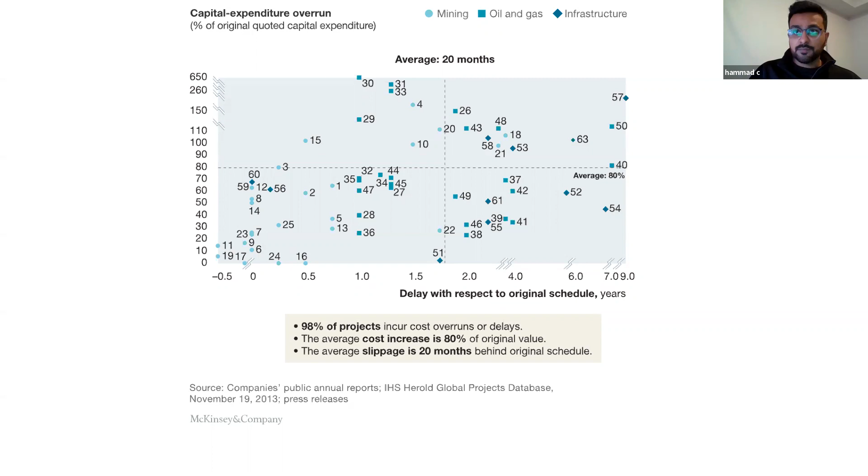But one of the things that really is stark and causes a little bit of concern for folks is the fact that the majority of projects are over their original budget, and behind their original schedule. So that means that not only are we going to be using more money than we anticipated to build these projects, we're also not going to be able to deliver a lot of these on time. So what's a way that we can reduce some of this risk?

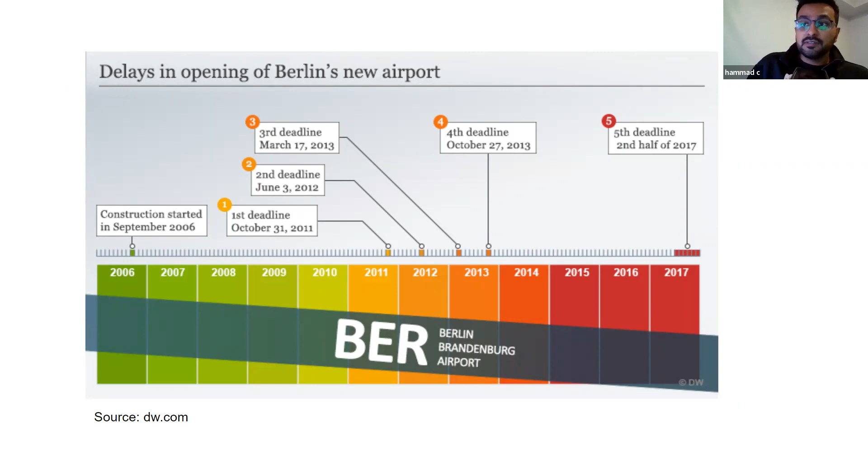Well, looking at some of the more advanced societies around the world, we realize that even they're facing these problems. So if you look in Germany, at the Berlin airport, this project was about 1.2 billion euros over budget, which is about 6 times what they originally thought. And not only was it behind schedule, but it was ridiculously behind schedule. Originally they thought it was going to open up in 2011, and they weren't able to open up until even recently now.

And if we shift gears and look at Apple as the tech guru, even though they're the most advanced company in the world, some would argue their project was more than $2 billion over budget and almost 2 years behind schedule as well.

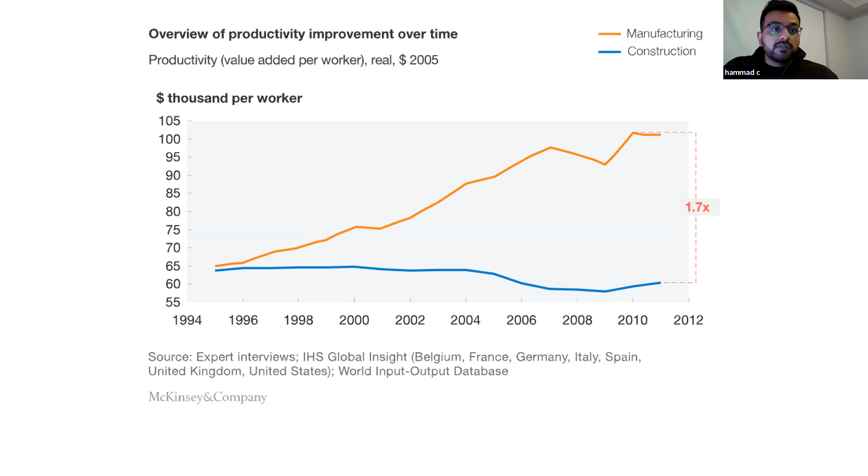Another key piece of information, which is really driving construction technology and design technology right now, is the productivity gap. So essentially at a high level, what this means is if you look at construction compared to any other traditional industry, especially manufacturing, there's almost a 2-time gap in how every $1,000 per worker gives you a return on your output.

So what we're starting to see is a shift within the AEC industry. And a really good example of that, in my opinion, is Dell from the computer industry. Back when Dell started, they were essentially just putting together other firms' parts. What they realized they had to do to stay competitive was create virtual integration within the supply chain. So they made strategic partnerships, and Michael Dell called this a tightly coordinated supply chain.

And what this allowed them to do was not necessarily spend capital to buy up companies, but make strategic partnerships with other companies in the supply chain so they get better pricing and could compete. Now, this is similar to what we're seeing with large projects within our industry. So think about your large hospitals, highway projects, or even your public library projects. They're typically public procurement methods of a design build or a P3, where the architect, the contractor, the subcontractors, and the owner are all creating these kinds of relationships.

But one of the key differences, for architecture especially, is the fact that we don't have two buildings that look the same. Even if it's a hospital or a high-rise tower or an airport control tower, all of these are going to be unique time in and time out.

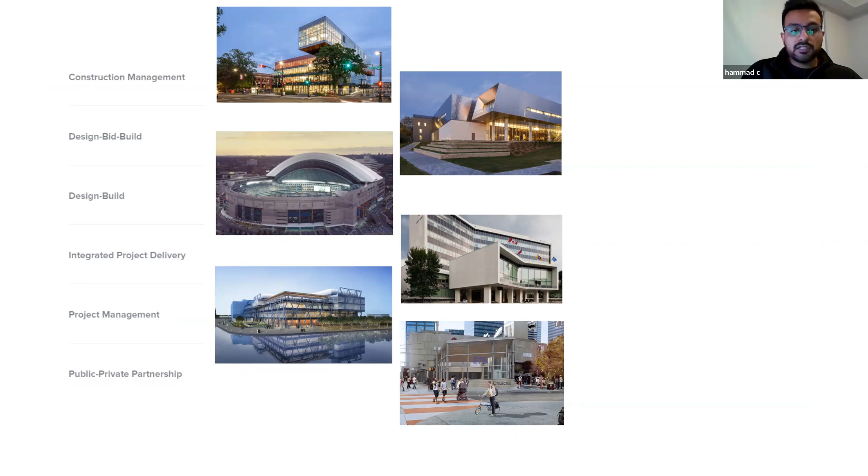And so that is very, very reflective of why there's a lot of different contract types in the industry. So we work across anything from a CM or construction management contract all the way down to a P3, and each contract is trying to shift risk, right?

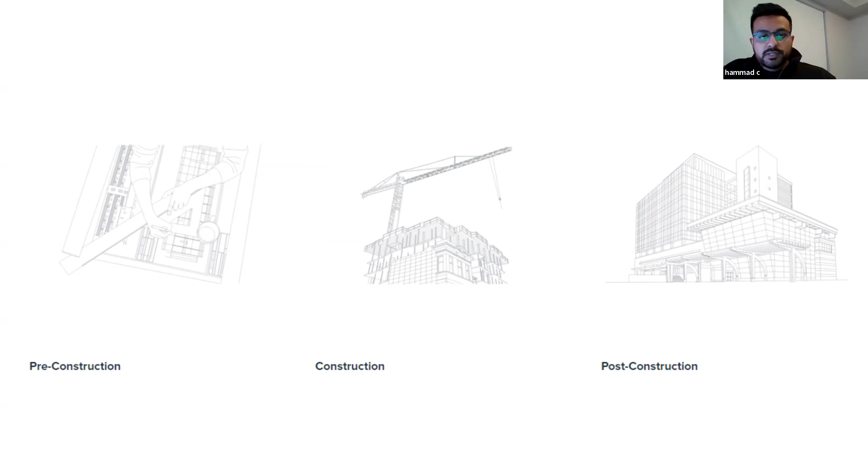Now, another key piece of information is the fact that according to some estimates, so this is McKinsey again, and there's various estimates you could take a look at, but we have a lot of folks that are estimating that there's about $1.5 to $2 trillion being left on the table from a loss of productivity. So that's where VDC is coming in. So what we're trying to do is focus on each area of a project's life, pre-construction, construction, and post-construction, and really implement a process that allows us to leverage construction technology.

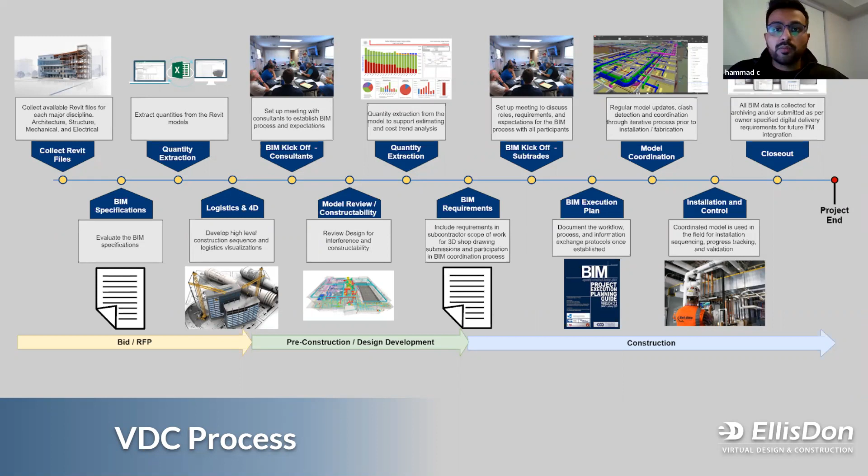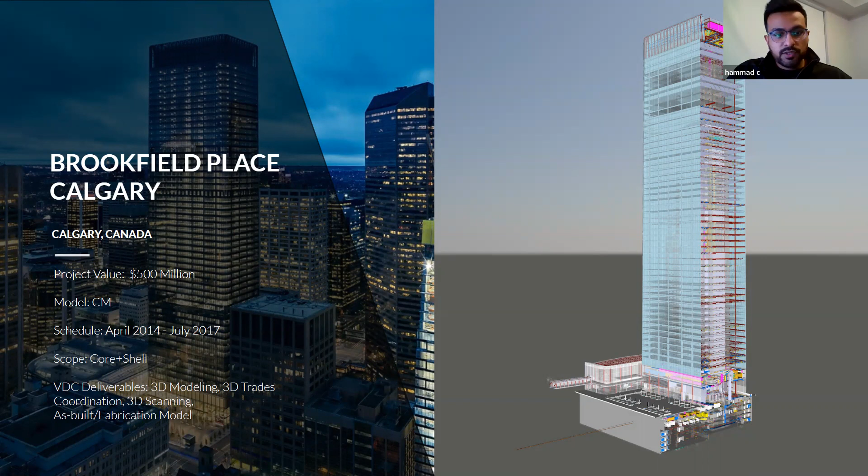So I'm not going to go through this process in detail, but I wanted to explain that as every project evolves, whether you're on the design team or you're with an owner or you're working for a general contractor, so on and so forth, there's a very stipulated process that you could follow to ensure success on your projects. And this is becoming more and more clear as a mandate. So right now we're working on dozens of projects. Brookfield Place, we wrapped that up recently, and there's some pretty heavy requirements on that. So $500 million project, where we use 3D modeling with the trades and the design team, some 3D scanning to create an as-built model at the end of it.

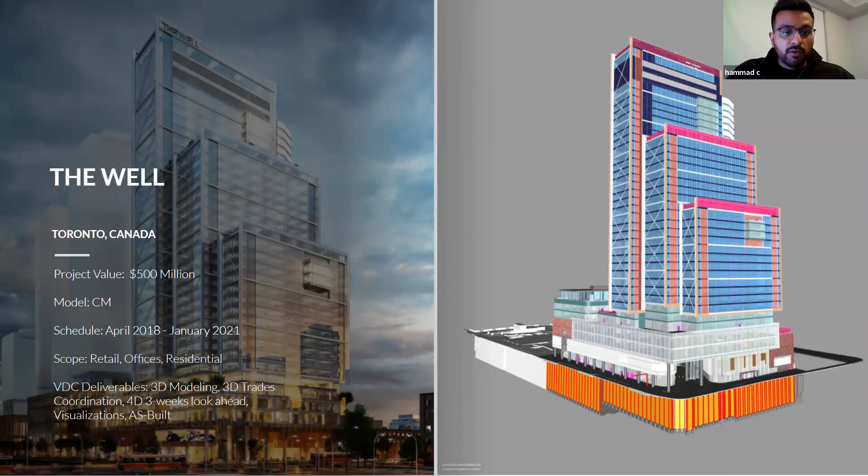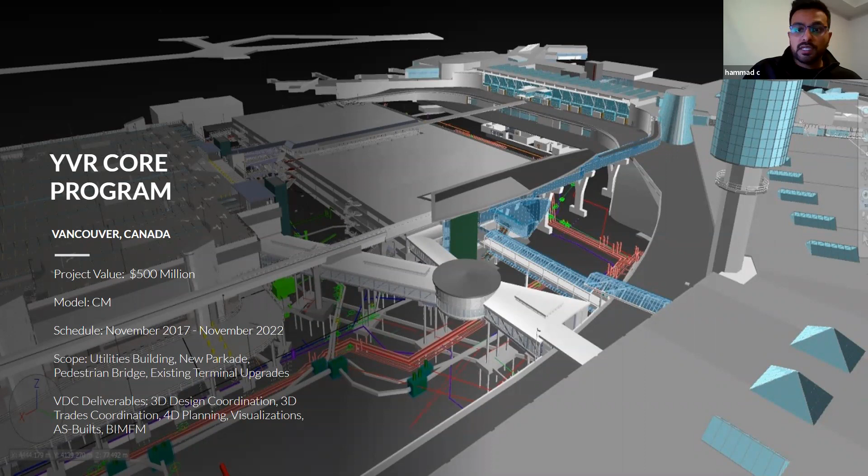And then lastly, at a high level is YVR. So this is a commercial project with a lot of infrastructure guts that is part of a very unique scope of work, right? So not only do we have to use 3D models to get this project done, we have to deliver 4D deliverables to the client, and we're 3D scanning, and there's also a lot of data as-built requirements. So this is the full gamut of using construction technology, all while making sure that the airport stays operational. So it's quite a heavy project.

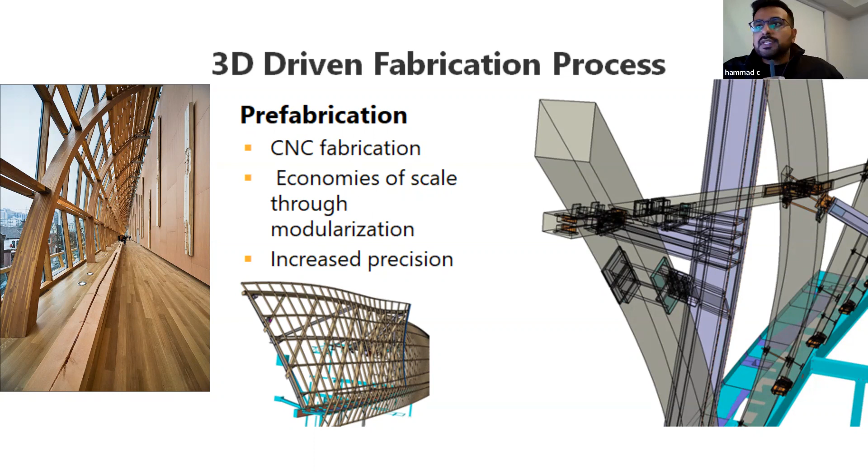And you know what? We use it on big projects, small projects, all across the board. We work with a lot of smaller architectural firms, some really big firms, and at the end of the day, the tools make it a lot easier for us to pull off a smooth execution of these projects. So if you look at the AGO, Art Gallery of Ontario, it's a very significant project, architecturally speaking. And once you go inside, you see this beautiful work of art, literally, which is the facade. And without these sort of 3D-driven fabrication technologies, we would not have been able to pull this off within the time frame that you needed to get it done. And same thing on the back of this building.

If you look at that staircase there, it's just, again, another piece of art. But how are you going to coordinate that without 3D tools and technologies? So what we had to do is break this out into different scopes of work and packages. And once different elements arrived on site, we used a 3D scanner to capture this information so that the next scope of work or contractor could build their information to coordinate with that.

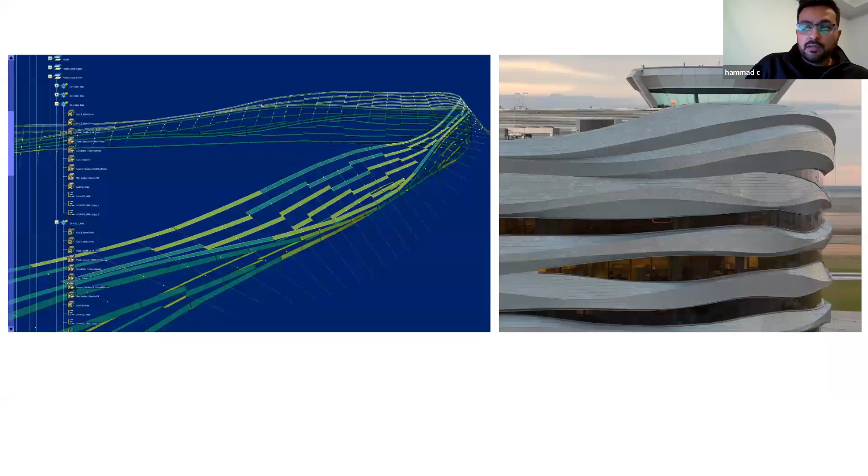If you look at the Edmonton Control Tower, that's another really good example of how technology not only made it possible to design this information, but also how it made it possible for us to fabricate and install.

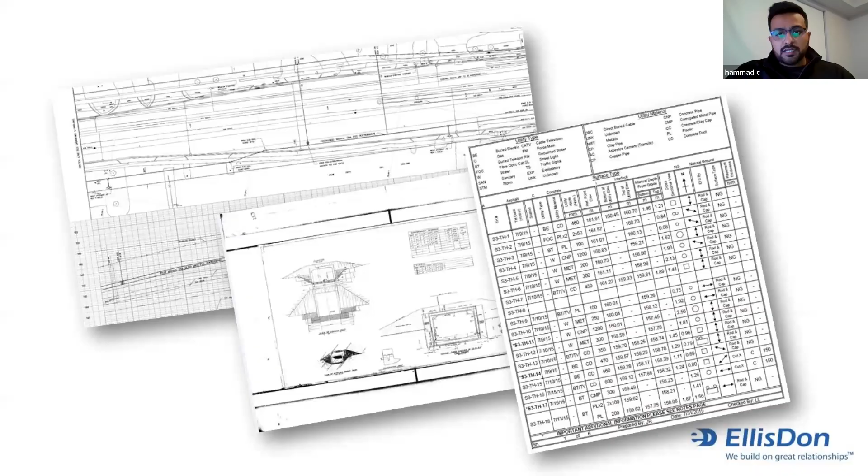So essentially, to put it at a high level, we're looking at creating more tangible information and de-risking this for everybody in the project. So typically you'd look at 2D drawings like this, sections and schedules. What we found is that if we have 3D tools and technologies, we can put together information that very accurately shows what's going on.

Oops, seems like we lost. Did we lose Hammad? I'm just seeing a kind of a lonely little white telephone handset. You're still there though, Henry, right? I'm still here. Hammad, are you still there? Looks like he might have. Do you want to send him a chat, Henry, to see if we can get him back on? Yep. That serves me right for touting the reliability of Zoom, isn't it? I should have known that if I said that, we'd have something like this. You jinxed it. Absolutely. Okay, let me just send him a quick message. Okay. Oh, he's back. He's back. Wonderful. Hello? Hey guys, can you hear me now? We seem to have missed you for a second there. Perfect. Hey, sorry about that. I don't know what happened there. It's all good. All right. Can you see my screen? Yes. All right. So sorry about that, everyone. Picking up where we left off here.

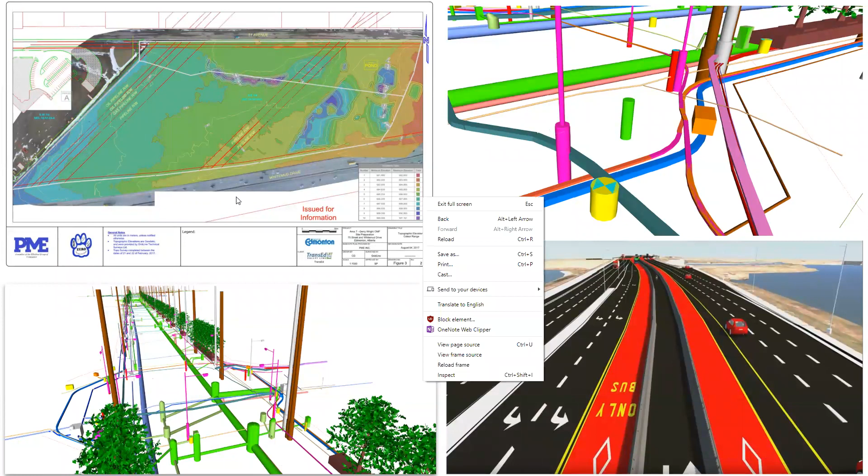So essentially what I was trying to get at is using these tools of 3D technology, not only does it make it easier for people to visualize what's going on, but we can catch a lot of these issues that typically fall between the cracks on 2D drawing production. And so we're going to go through some examples and give you a little bit of an overview of what we mean.

So at the beginning stages of a project, an architectural firm and a client may be working together and they have an idea of the project they want to build, but they don't know who's going to build this project. So what they do often is come out in the form of an RFP, or request for proposal, and ask different construction teams to explain how are you going to put our building together. And so what we have been focusing on at EllisDon is creating tangible little videos that marry the construction schedule to the actual model to explain to our clients how we're going to be executing our portion of the work.

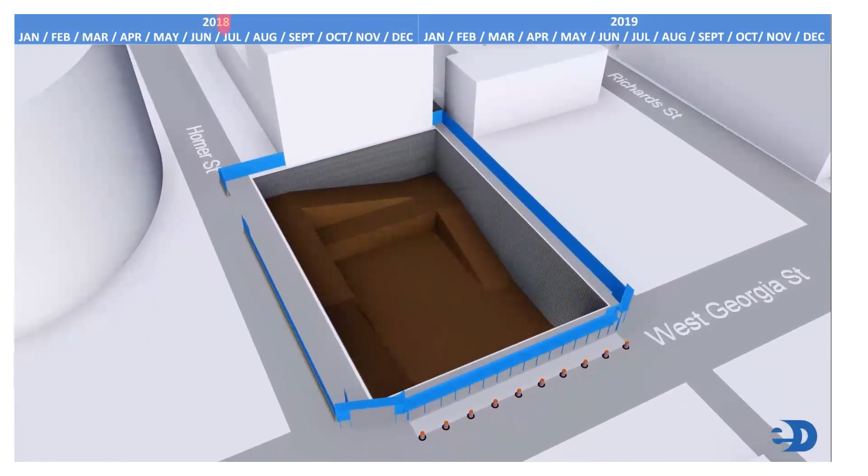So it can include things like your trucks, where the material is going to come in, your cranes, if we have any lane shutdowns. And then it also goes into the detail of showing the structure and your facade, your curtain wall, and so on and so forth. So I'm just going to speed this video up a bit so you guys can take a look.

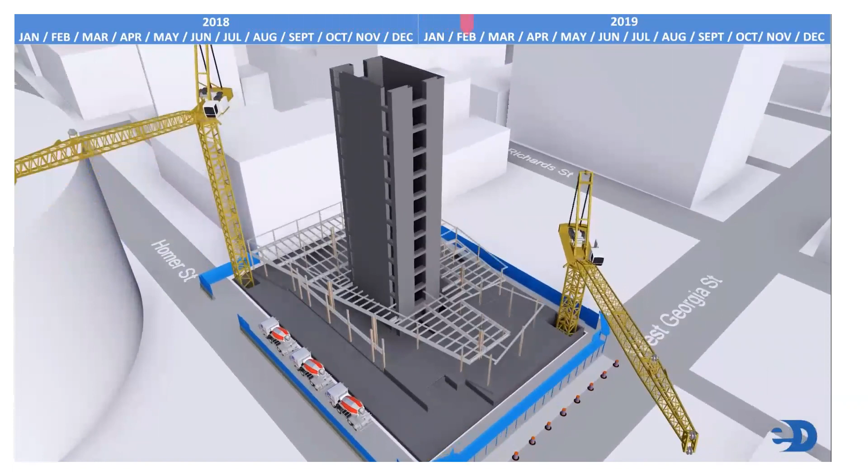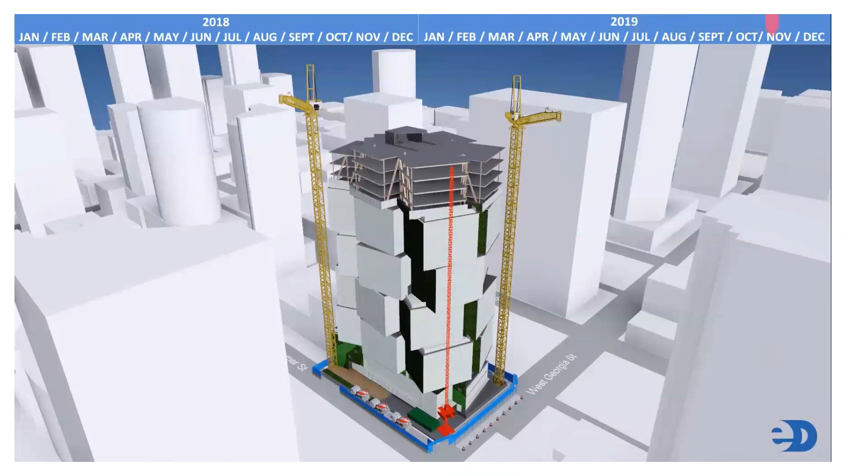And on this 400 West Georgia project, one of the things that really makes it a challenge is that each of these bays that you see, there are 4 floors each, and they're all offset and skewed. So you don't really get a straight path throughout the tower or the building. So placement of cranes or your material hoists, or even logistics of getting your typical services like your elevator up, really do play a lot more of a challenge than you would anticipate, even though it looks like it's just a bunch of boxes stacked on top of each other. So that sequence is very important to explain to the owner, but that's a little bit high level.

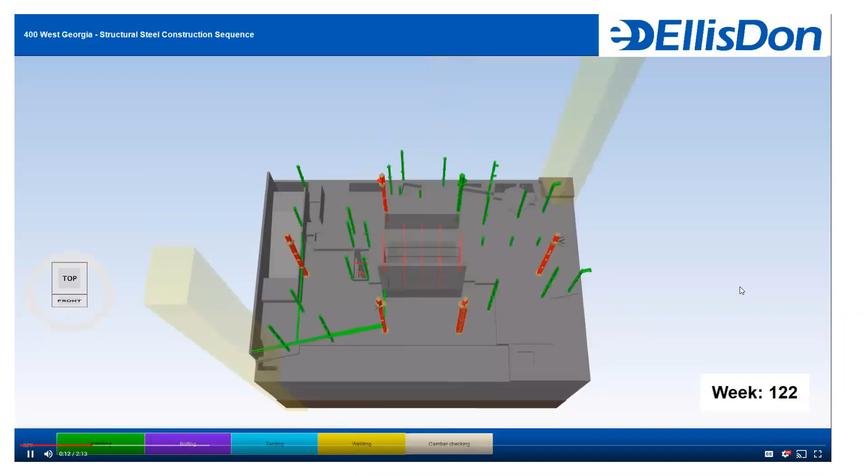On the same project, we were able to use 4D modeling to take it a little bit more detailed. So we had to explain in detail, to ensure that we stayed on track for a construction schedule, how we are going to use each of these model elements to replicate our installation sequence for steel. So this is literally down to your nut and bolt level granularity.

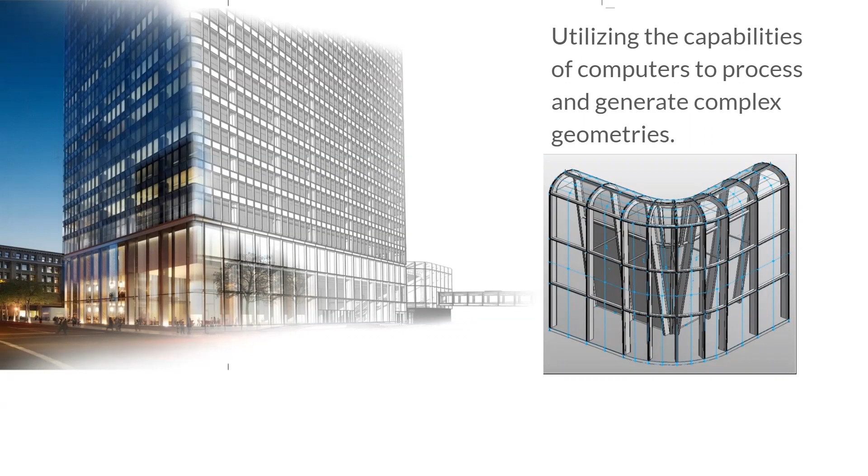The other reason why this technology is becoming a lot more important for us at EllisDon and for our design partners is it's becoming a lot more complex in terms of the geometries and the needs and tastes of clients in the industry. So in order to pull this off, we need computers that can do things like parametric modeling and leveraging repetition. But at the same time, we're losing that ability to have insight into very detailed, coordinated building systems.

Because even though the building itself is the main goal of any project, in order for it to operate successfully you need mechanical and electrical systems. Think about that as your lungs and your heart and your eyes and all that kind of stuff in your body. These are the things that really make the building valuable and sustainable long term. And by using these 3D tools, you're able to dig into those, and even unconventional areas such as concrete.

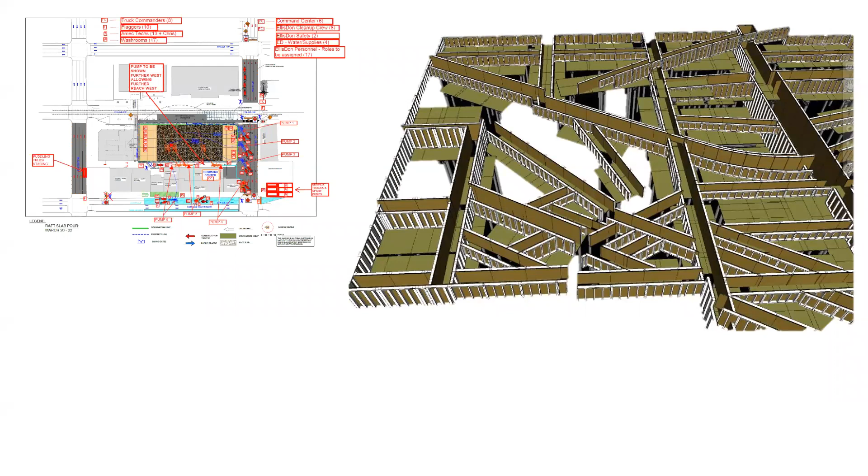So that same project, Manulife downtown in Calgary, we used that model and pushed it down to the folks in the field so that we could get prefabricated concrete formwork. You can see the concrete trucks there on the bottom left, and on the right side, that's all the prefabricated elements derived from a model. So if you think about it at a high scale, you're an architect working on this building, who would have thought that your model would have been repurposed downstream to provide these formwork pieces for these guys with hammers and nails, right?

So the technology really has some deep and profound impacts. Another really good example of that is shop drawing reviews. On one of our projects, Brookfield Place in Calgary, we had these huge monster transfer girders, and essentially they transferred the load of the tower to the ground below and into the parkade.

And so to order these monster girders, the steel had to be ordered directly from Germany, and there's a procurement tax. So when you're ordering something this big, it comes on a boat, coming from the port, so you have unknown factors like customs and stuff like that.

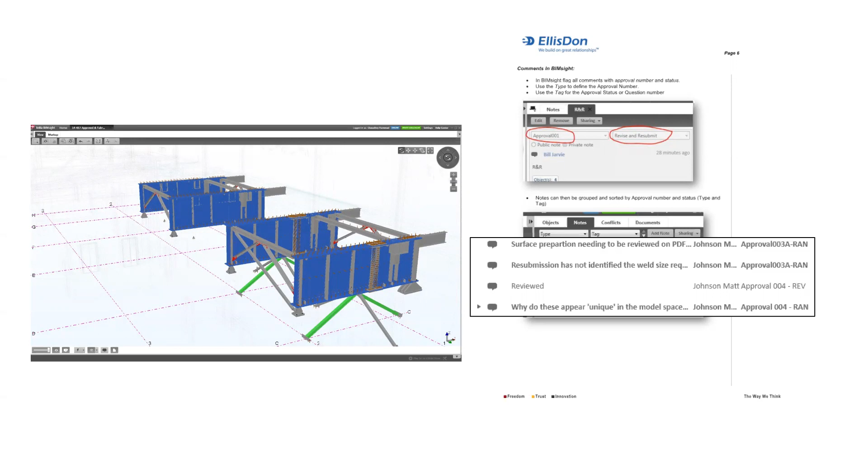But shop drawing reviews was not something that we could waste time on. So we implemented a 3D shop drawing review process where the engineer, our fabricator, the architect, and the owner were all in a 3D environment getting updates real time. Think about it like MSN Messenger or ICQ back in the day, but for construction projects, right? And essentially that saved us a lot of time. We only sent one submission through at the end of the day, which is quite remarkable.

Another really cool project where we used various technologies was the PARQ Casino in Vancouver, right by BC Place. There were a lot of variables on this project. The hotel requirements kept changing, there's two different hotels, and the requirements for the actual casino were changing at the time. So every design iteration, we had different amounts of concrete and steel and curtain wall and you name it.

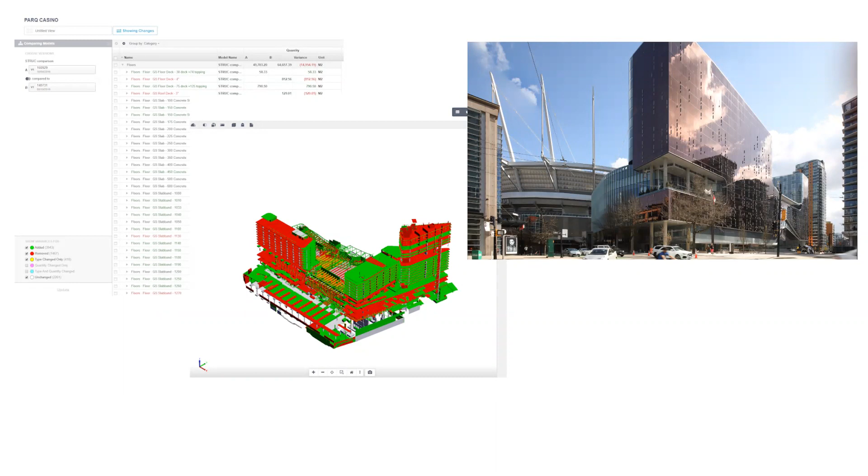So using technology allowed us to simplify and color code information to this level, where red meant this is no longer there, green meant this is brand new, and other colors could signal that maybe only a little bit of this has changed. We were really able to bring that kind of technology and approach to a lot of our different projects. Not every project is the same, so we don't use the same approach when it comes to technology.

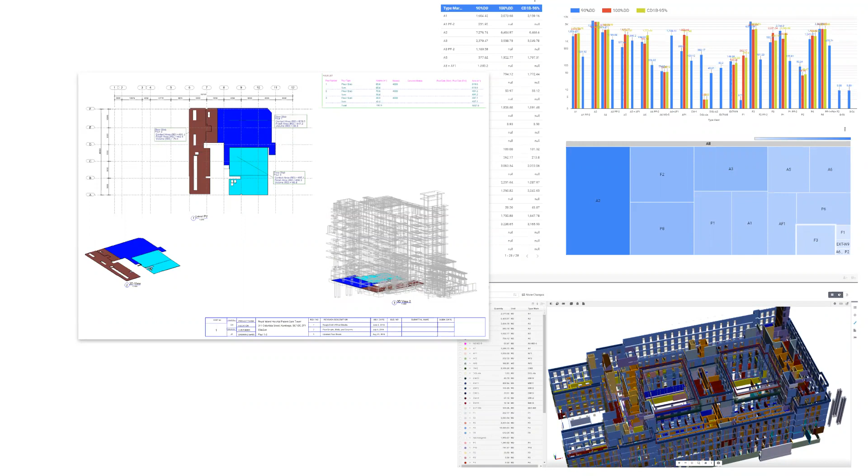One of the things that's really key is that everybody participates in a process like this. Everybody could be pulling their weight, but I often say we're only as strong as the weakest chain link we have in this process. So if that means the architect's not working, or one of the subcontractors, the efforts of everybody are broken. In our projects, we have the owner, the architect, the designers, construction administrators, the subcontractors, all sitting there calling in, working together. It's a very good reflection actually of what Douglas and Henry are doing with these virtual lectures. It's the same kind of idea.

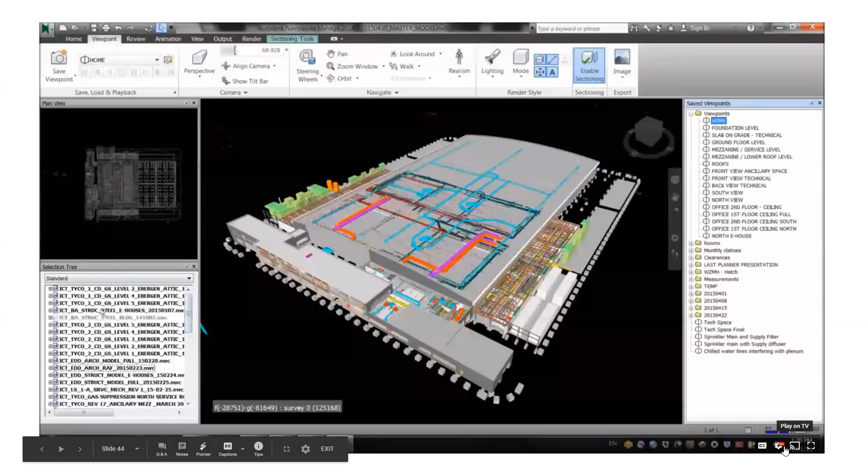What that looks like on the model or 3D side of things is you end up with these really highly detailed models which are brought together so we can run construction coordination challenges, like does this duct fit through this wall. But we can get even more granular, like we need X amount of clearance from our door swings, or clearance for different equipment pieces. So the model is really a replication of what's going to be built on site.

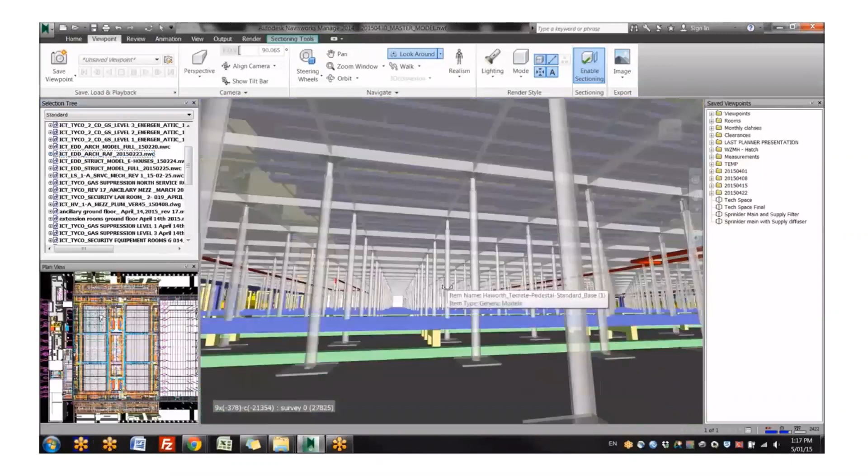So we want to treat that with that same kind of value that you would building it out in the real world. And that's why it's really critical to partner with folks to understand the value of this technology, because downstream the effects are just too much to measure.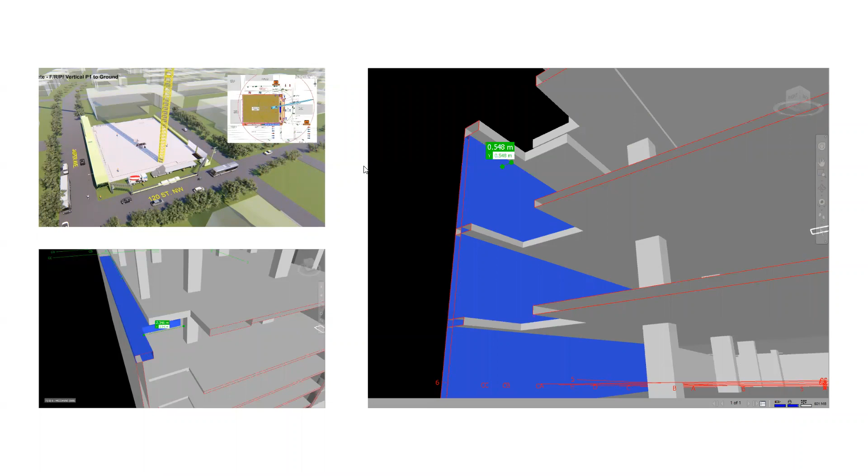After doing that, we were able to render an image that you see on the top left there, which was distributed to the owner group in a way that they could distill the information. So we still produce those 2D drawings that are very information heavy, but the way we proposed it to the client let them present it to their stakeholders and ultimately helped us move forward with a solution that saved us a lot of time and money too.

One of the ways that we're really leveraging this is using platforms like Revizto or BIM Track, where you're able to track a lot of this information regardless of the platform.

Recently we had to do a helicopter review where there's very stringent requirements for the health authority, and one of the consultants only used a Macintosh. Luckily, because we're using tools like Revizto, we were able to get their team on board, the client on board, and a bunch of folks on site using iPads, and it didn't make a difference because of that level of technology integration.

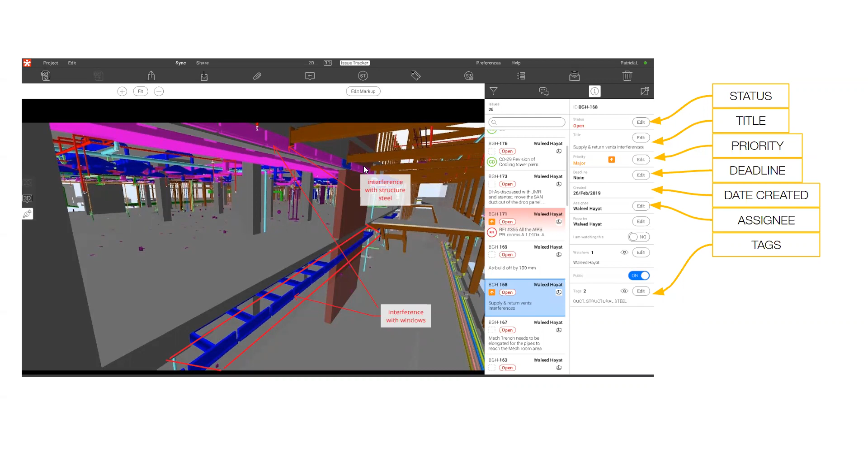What we're able to do is track a lot more than just simple clashes of, hey, this duct isn't hitting there. It's also using this to create transparency between design teams.

Ultimately, we're able to pull a lot of these metrics, which is what really is driving decisions nowadays, is data. So we can filter down by level if you wanted to, or by a different discipline, to see how many issues we have or how many tickets we may have open and the progression of us solving them. That way, within 30 seconds, we can tell if the project is progressing or not, and we know that we can build off of it.

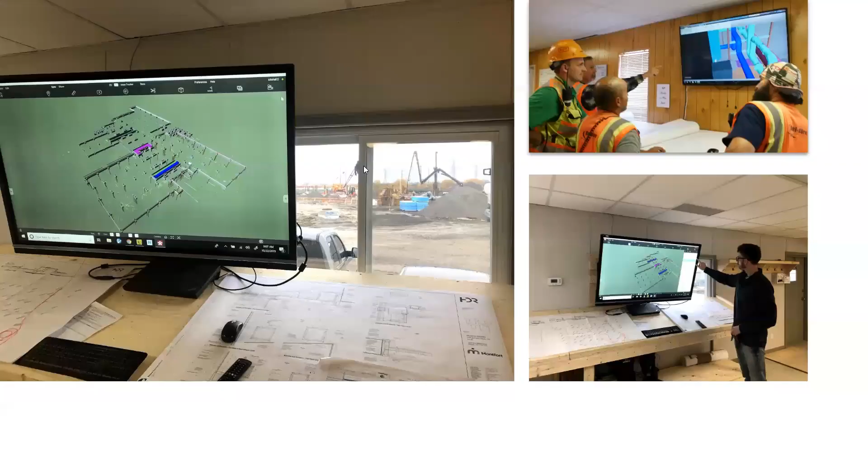Going out on site with your iPad, you can pull up the model really quickly compared to looking at the progress to make sure everything's going okay. If you go to most of our site trailers now, you'll have these TVs, you'll have the models and the drawings paired, and you'll increasingly see more and more of the folks, the trades and the owners using the model over the drawings.

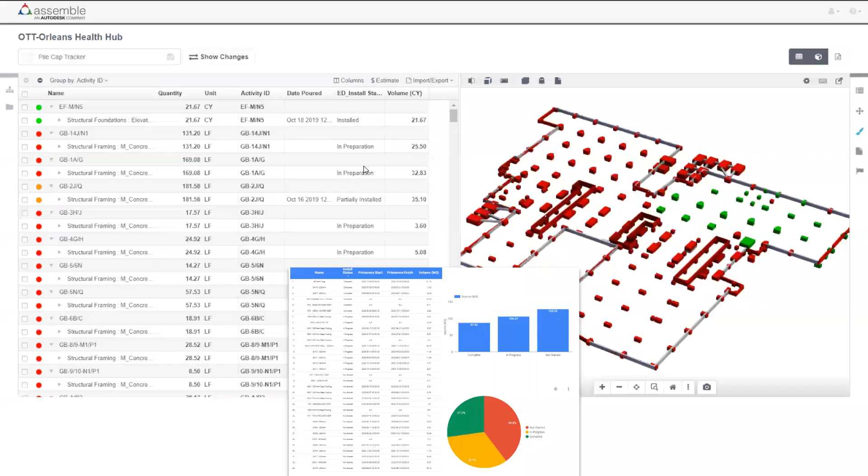Going back to the data, this is an example of how we're tracking it. Anybody in the project can log into this web-based viewer, and with simple color coding, green means it's been installed, red means it's not there yet, and we can compare that to the actual site photo. I'll just go back and forth again because I think it's really cool, but we're using very simple model-based communication to represent what's happening in the physical world.

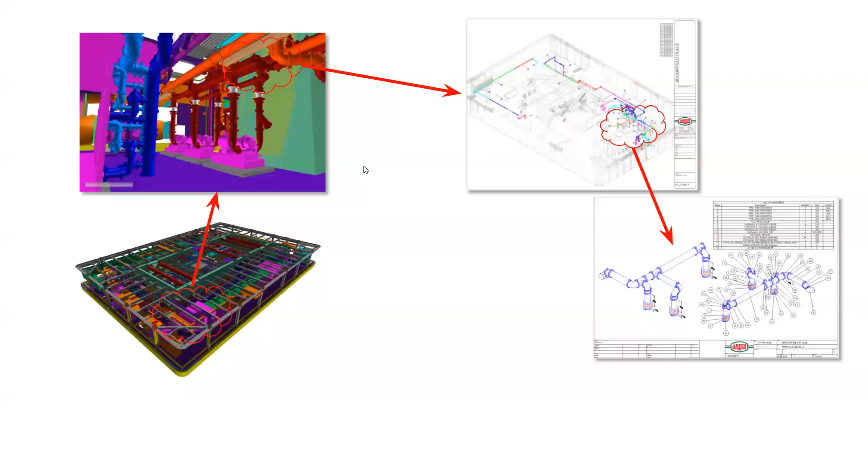These kinds of processes allow us to use technology to a level where we can actually fabricate off-site. So if you look at these drawings here, what they're illustrating is prefabricated spools for systems in a high-rise tower. This is just like Lego, so the folks come on site and they install this information just like Lego.

So they can be in the form of prefabricated multi-trade racks. It could be bathroom pods. It could be mechanical skids for systems. It could even be your facade architectural system.

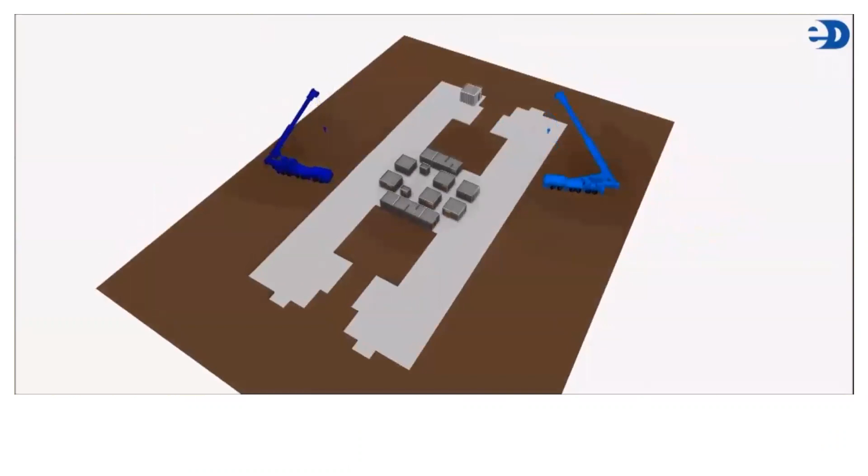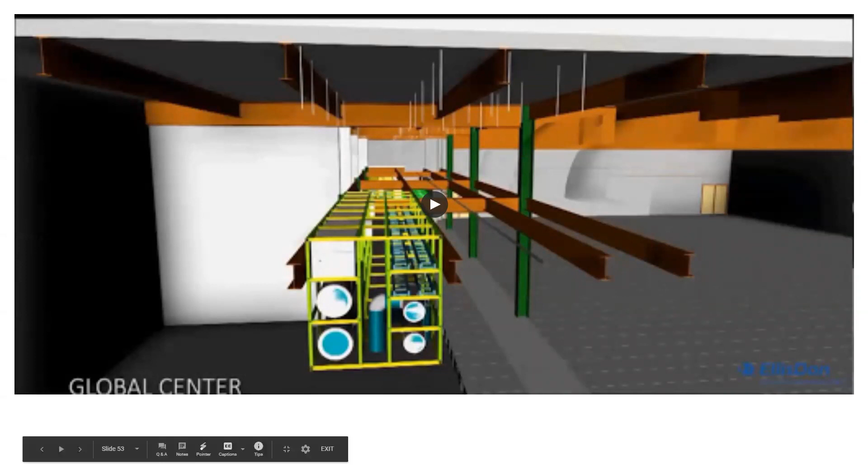A lot of the benefits for this is if you do it right financially, there's some incentives at times. There's a lot of flexibility for you to make decisions and change the design. You can control the quality a lot more than trying to build it on site with the weather conditions we typically see out here. And you can allow for just-in-time delivery. At the end of the day, safety metrics go up as well. There's a huge correlation of safety being a lot higher in prefabrication elements.

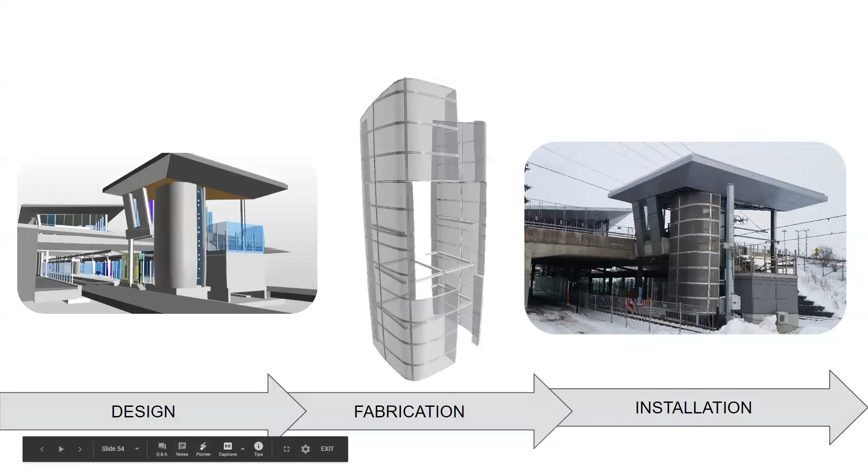Here's another example from a project we just wrapped up where we used this approach. We used the design model with our contractors to get the fabrication details out, and at the end of the day, it was installed like that. So it's not the future anymore - this is what's happening in the industry.

What I want to show you is a little bit more: adding logistics, adding schedule, you get 4D modeling - we looked at that video at 400 West Georgia. But what if we add financial information to that and resource tracking? Then what you get is something called 5D modeling, and this is going to be more and more important as productivity tracking gets tracked.

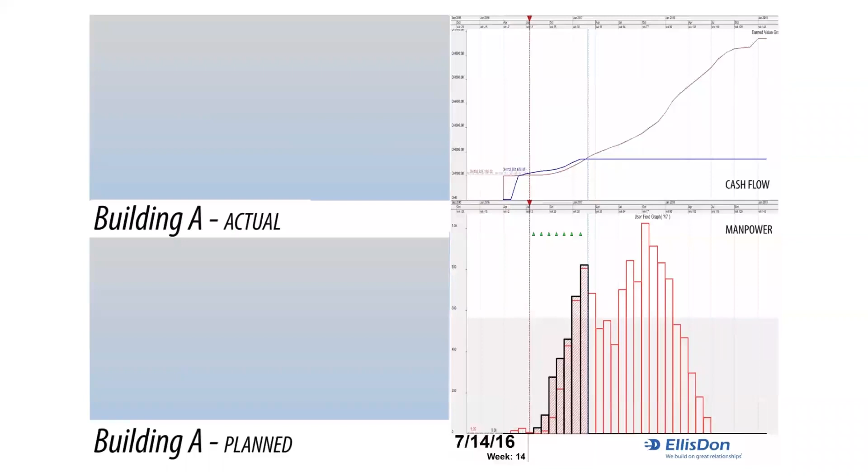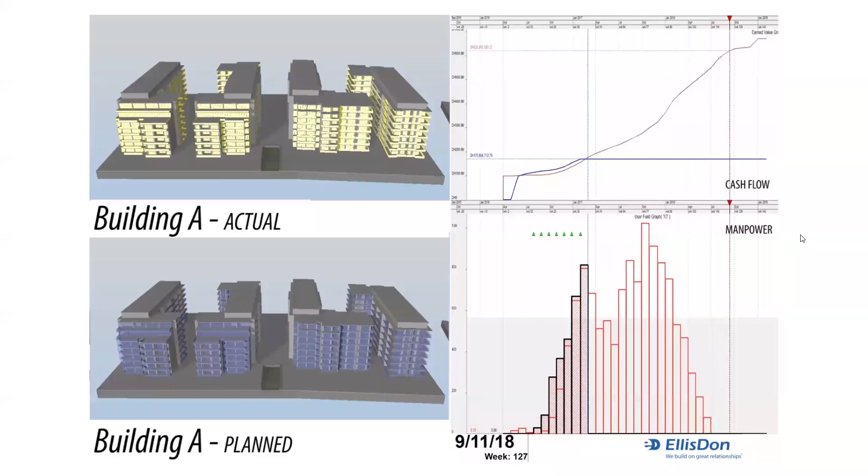We can look at not only what we were trying to build plan-wise, but what we're actually building, compare that with how much money we've spent versus what was forecasted, and how many people we have on site physically working. This is the granularity the technology is going to allow us to get to. This isn't commonplace yet - it's still a bit out there on the fringes, but the fact that we have clients looking at this means the industry is shifting to that level.

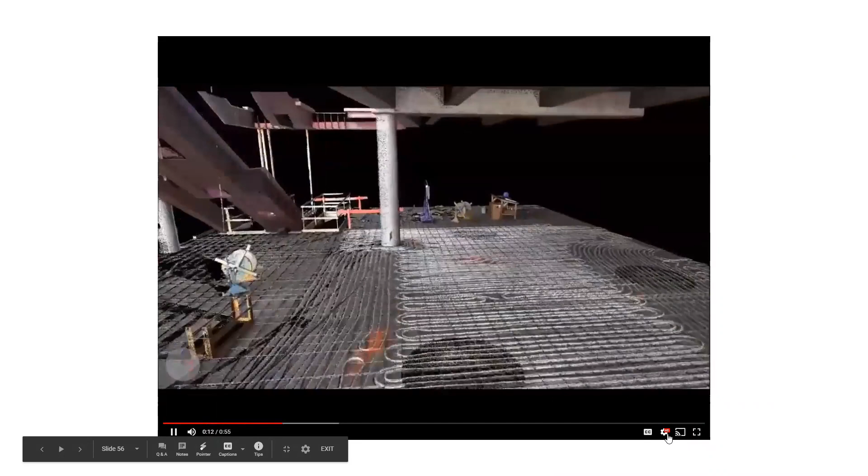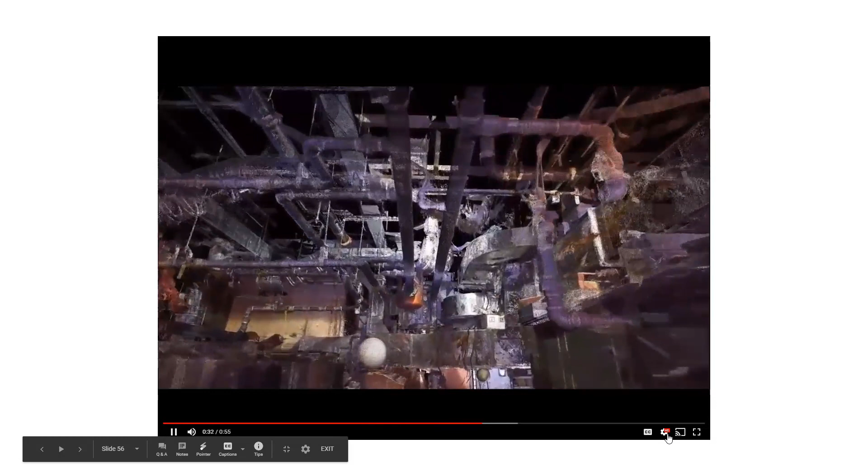Another really great aspect is using technologies to capture what's around us, so we can design for repurposing jobs or future tenant work. What you're looking at right now is from the YYC International Airport, where there's a lot of in-slab heating - these little pipes carry fluid that warm up the slab, providing a nice, warm, comfortable environment for travelers. But they needed to know where those pipes were for future use, so we could put kiosks in without damaging the line. This is a mechanical room as well, for another project where they needed to expand their building and bring in mechanical systems to tie into that.

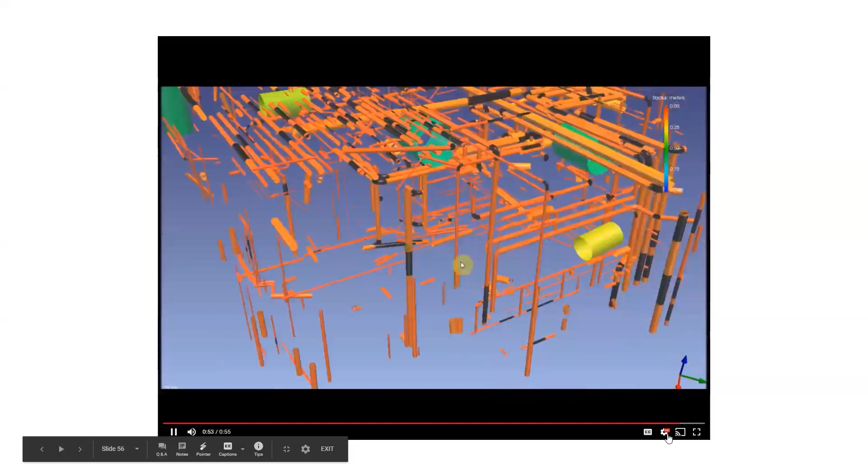By going out there, 3D scanning all of it, and creating a 3D model, giving that back to the design team, you're really able to reduce a lot of risk. A lot of the design firms we're working with now, some of the more cutting edge ones, are actually able to do a lot of these processes in-house. For us, that's an interesting shift - architectural firms that want to use BIM and technology are starting to use scanning as part of their workflow too.

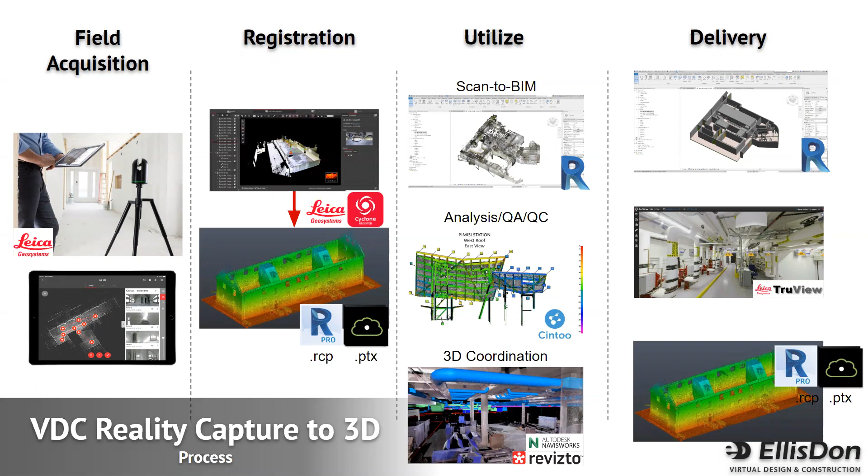Here's our overall process for going from the field to your final product. We use a laser scanner - there's a variety out there, feel free to reach out if you have questions. Once you scan your information, you register it so it's all aligned and works with your model. Then we bring it into Revit, do our scan-to-BIM modeling, do some really high-level QA/QC on it, and ultimately 3D coordination, which allows us to do some really cool things.

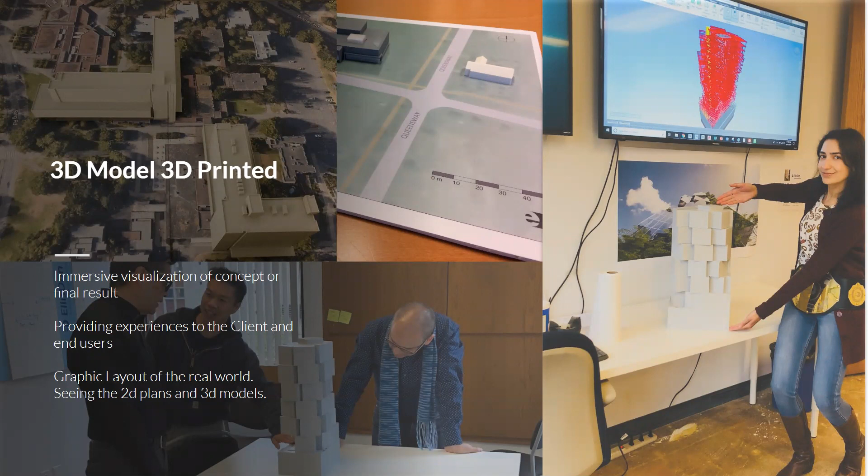And the model actually comes apart. We print out site plans that are very indicative, either like a Google Maps or something similar. And you plot the building down and you show them how much room certain things are going to take, your cranes and stuff like that. It really allows not only the design team and the owner, but even some of our internal folks to visualize it in a way that no amount of 2D drawings or 3D models could ever convey.

And another really neat technology that's just shot up over the past couple of years is 360 photography, where people are able to literally record videos in 360, walk a project and dump that information as an archive back onto a system. And so we've been experimenting with this. We have a lot of projects now that just use 360 photography to track progress.

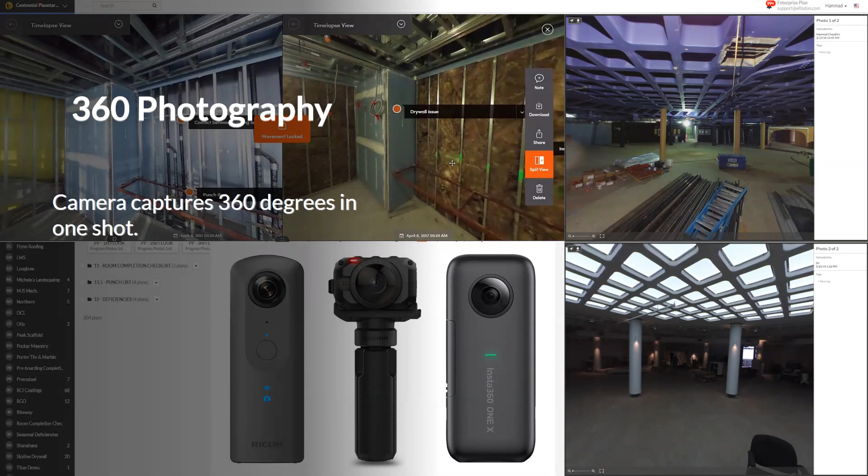So where your piping is and you put your insulation and your drywall, instead of taking 10 pictures of one room, you only have to take one. You can come back and look at it. Very cool. And now we're starting to see integration of 360 photography back to your model, so you can compare your design to what's being installed.

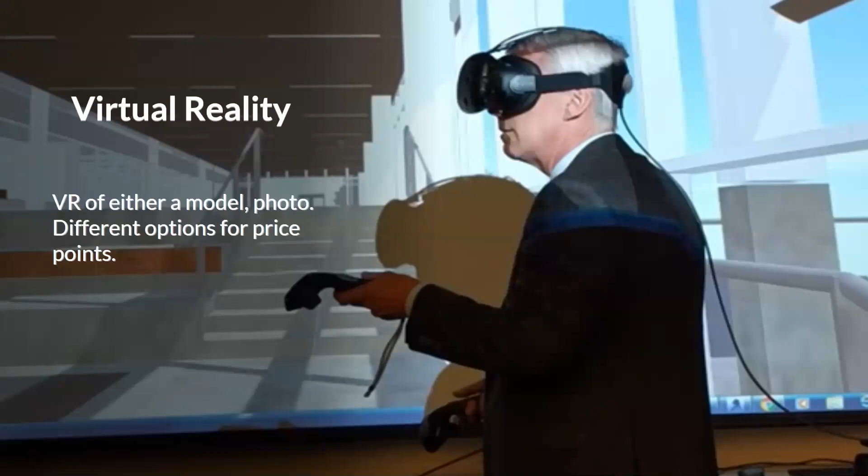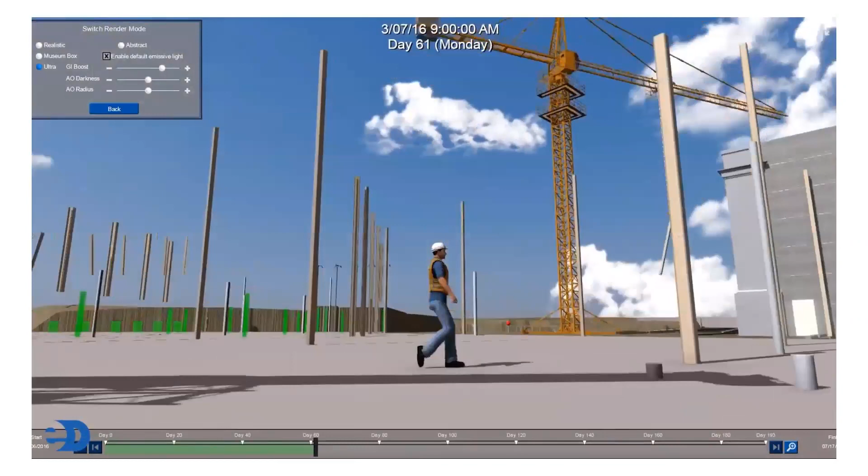And one of the more video game aspects, if you will, of virtual design and construction is the VR side of things. So we're starting to see a lot more traction in the industry with this. So not only are clients starting to ask for it on the larger projects, but we're starting to see that even some of the talent that you're trying to recruit now at companies want to see these tools used within day-to-day work or some sort of a process in the company.

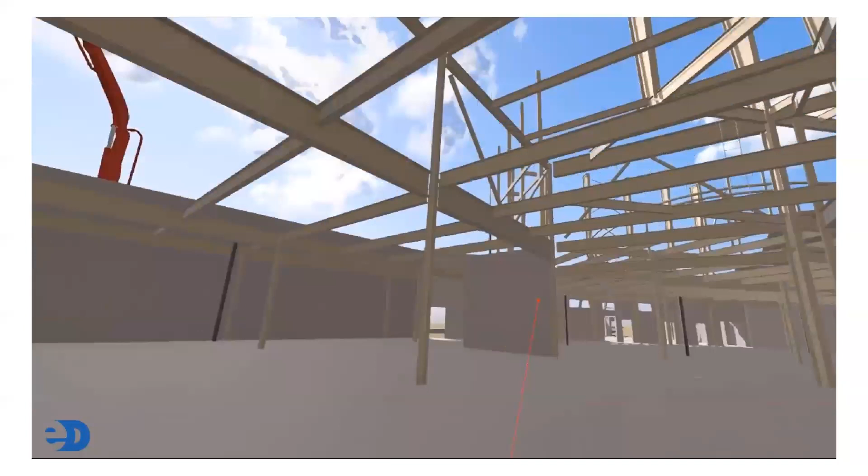So just recently we had a meeting with a client in Vancouver, and they own about 3-4 high-rises, a very big complex. And as part of their RFP, they wanted us to prove that we knew how to use construction and design technologies. And so what we ended up doing was scanning their project, creating a 3D model, and then putting it in a VR environment just like this one here, and putting the client and their team into it so that they could literally fly through, look at the point cloud, and look at their 3D model, and really get a feel for what kind of technology is available out there.

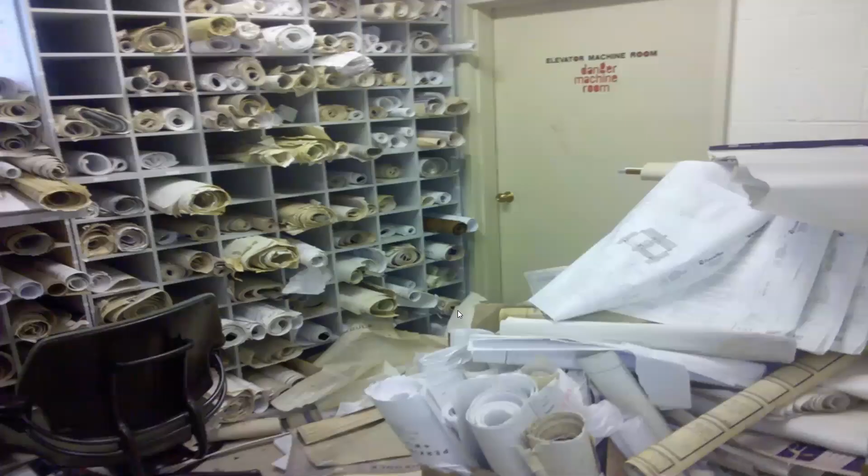And lastly, wrapping up, the project's done, you're turning it over. So what typically architects and contractors have to do is provide these binders and manuals to the owner and the operation team. So if you look at this picture, there's dozens of binders that are super thick. And anytime we come back to a project, this is what that room looks like at the end of it, right? So everything's sort of chaos and not organized. So what we've been really focusing on is how do we get that into a digital realm, right? So we leave the client with just a digital file that encompasses all of that.

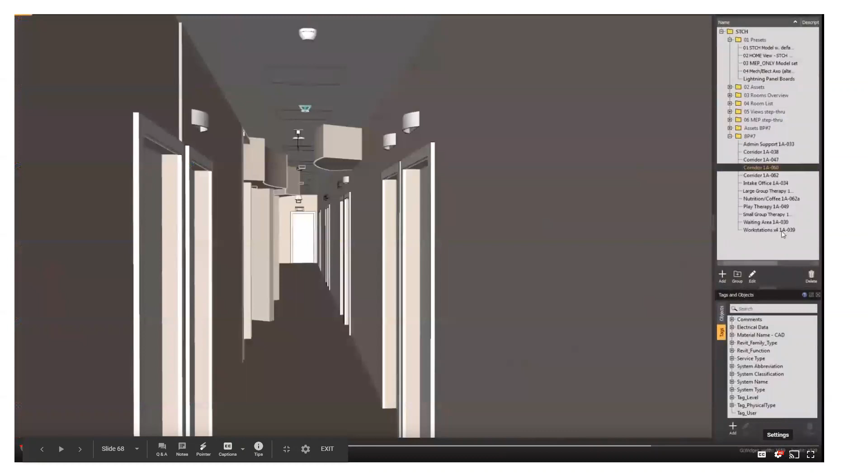So this is an example of exactly that. We're able to create an as-built model that was embedded with all that data. So think about your shop drawings, your operator manuals, your warranty certificates, your installation dates, all of that kind of information being built into the model. Instead of looking through dozens of binders, you can open up the model, sort of fly to the area that you're curious about, click on that object, and investigate it.

And this is becoming a lot more intelligent as well now, and that's what we've been focusing on as well: why do we need to stop at that? Why not take this to the IoT or the smart buildings realm? And so at EllisDon, we have a group that also focuses on taking all of these backbones of your system and making them smart. So think about the high-rise towers that you folks see. Imagine in the next 5 to 10 years, you're going to be able to do the same thing that you can at home.

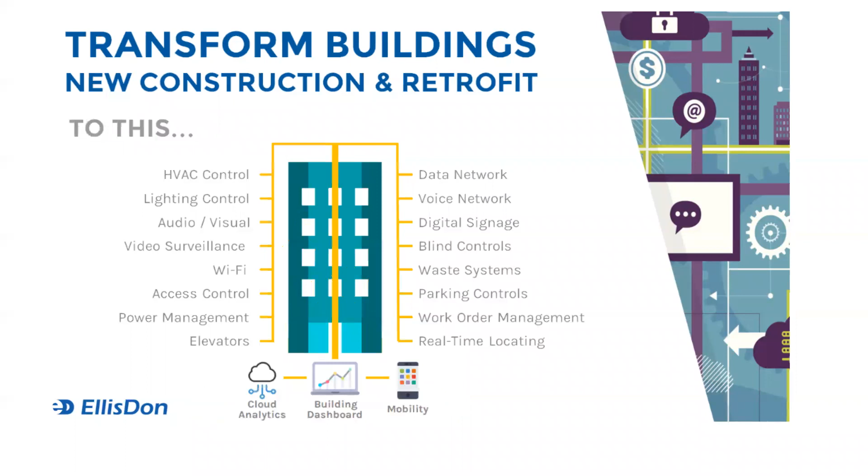So you can be like, hey Google, turn the temperature down, or hey Google, turn the lights off. Imagine that being done at a large scale throughout the portfolio of these corporations. So taking systems that are all chaotic, like you see here, and tying them into a single building dashboard that is really intelligent, and gives the owner and the users an experience that is refined and a lot more responsible for giving these optimized results, right?

So imagine what you can do if you know exactly how much power your buildings utilize throughout the day, throughout the year, and now you need to replicate and build another project somewhere, and so on and so forth. Or if some of your tenants are complaining, hey, it's too dark or it's too cold, you can look at these graphs and the heating from the sun to make these kinds of adjustments.

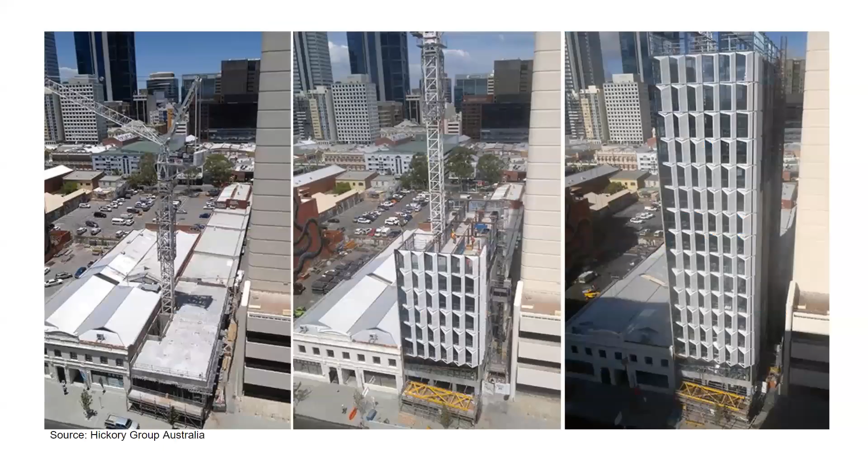Very smart. And we've been able to pull this off on half a dozen projects from coast to coast. Manulife, Brookfield Place, we're working in different facets there. And then even if you go out onto the East Coast, we have several projects in Halifax, Emera's head office. Very cool if you get a chance to check that out.

Really cool things that we're seeing with prefabrication, again, which is really driven by design and construction integration, is rapid growth of buildings. So what you're seeing on the left is about 10 weeks before what you see on the right. And so they were able to put the structure together, including all of your prefab elements, your bathroom, your facade, your concrete, within 10 weeks. Typically that would take you over 6 months on a traditional build method, right?

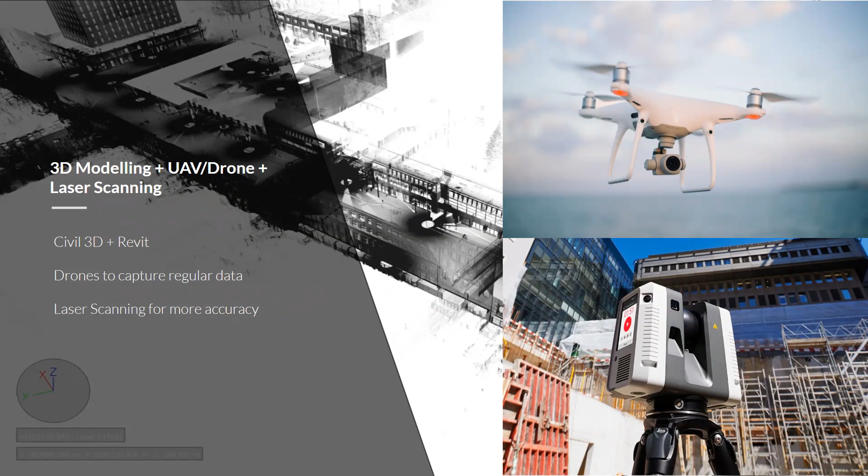We're also seeing a shift of technology being used to bring more integration between GIS and BIM or VDC. So the use of drones and laser scanning and 3D modeling to get more accurate representation. Of course, this is on large scale projects, but we're also seeing it on smaller projects where drone usage has become so easy. The app does most of the work. You still need to get your certification to make sure everything's good with Transport Canada, but the risk of the pilot physically flying is being offloaded by the technology, and that allows us to do lots of cool things.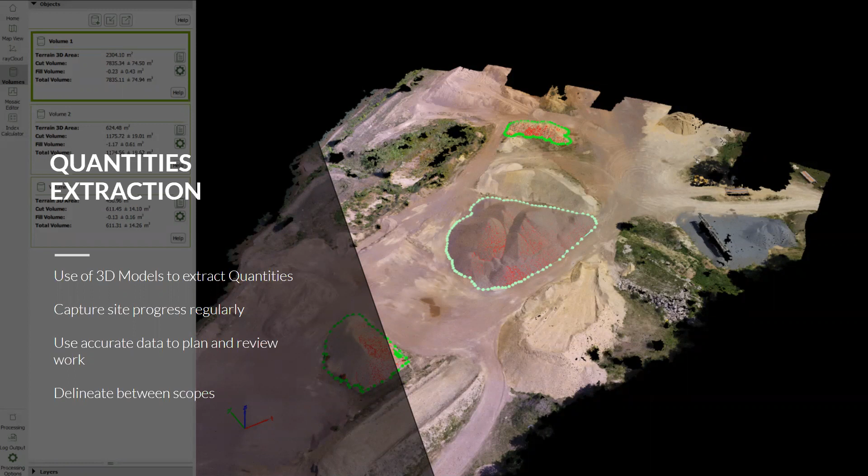So before you build your project, you could go fly and get an accurate understanding of the grading. It could be during the progress, so you know how much dirt's been moved. Or it could also be used as site update photos. But the real value is when we bring 3D models of what we're planning to build together with the existing conditions, the drone data and the laser scanning. Ultimately, you're meshing the different technologies, right?

And what we want to do is focus on the process. A lot of confusion exists about BIM being a technology. Quite frankly, it's a socio-technological process, meaning there's the people, there's the technology, and there's the process. And when you marry all these together is when you actually get the tangible benefits, right? So I don't want to leave anybody confused tonight thinking that, hey, we're using 3D models, we're doing a BIM approach. A proper BIM approach from an academic standpoint is a process.

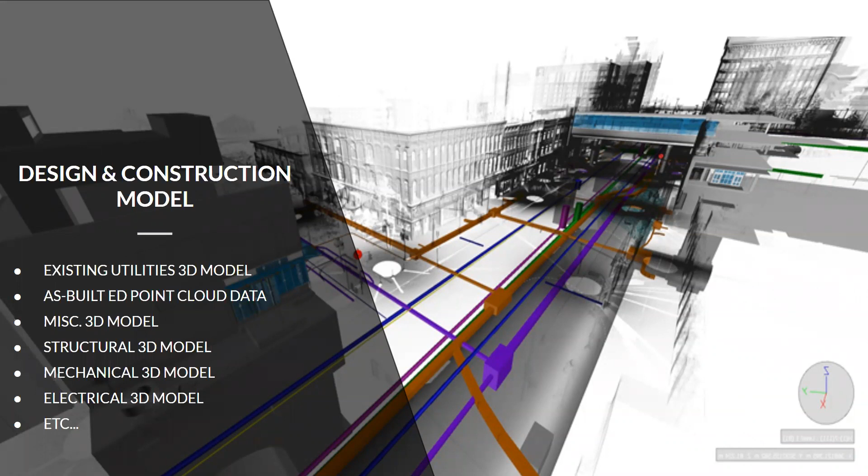And then looking towards the future, what is on the horizon? Machine learning is something that's really becoming well invested in, especially right now in construction technology. We're building a project out in Manitoba, Keeyask, and that's a huge dam. Imagine how many tours these big rigs do day in, day out over the past 5 years.

Well, with machine learning, not only are we able to get automated robots to drive these things, we can optimize our paths as well. So there's a lot more efficiency that you can gain. And the other thing is, it's hard to find people that have the skill or the training to drive these things. So you're addressing a labor shortage as well.

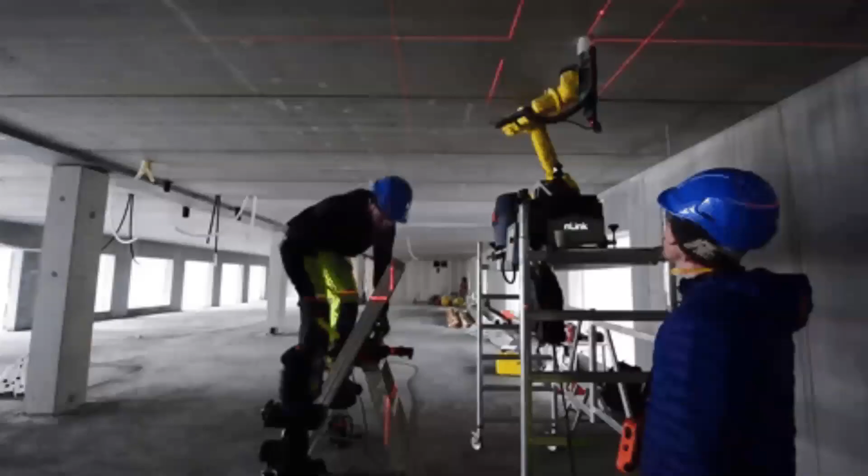Another really cool thing that we're starting to see is either using robots to replace humans or to aid humans. In this example, an individual will take about 3 to 4 times as long as this robot, but the robot can't really move itself. So in this kind of case study, it makes sense to have an individual with a robot versus having even 2 additional people for that labor productivity gain.

Or in other scenarios, we're seeing that people are developing these wearables that are helping people lift heavy equipment and get their jobs done while reducing that strain or that physical feeling that you get, right? So trying to get more people into the construction industry that typically you wouldn't see by using technology to reduce a lot of that physical barrier.

And of course, using the data, right? So how do you integrate your data? How do you read it? How does it inform your decisions or your design? And a lot of times, when I speak to architects or prospective architects, they sort of roll their eyes when I talk about design and data analytics. But that's why I put this video in here. It's a very real threat, especially for architects. And you know what? Douglas really alluded to this.

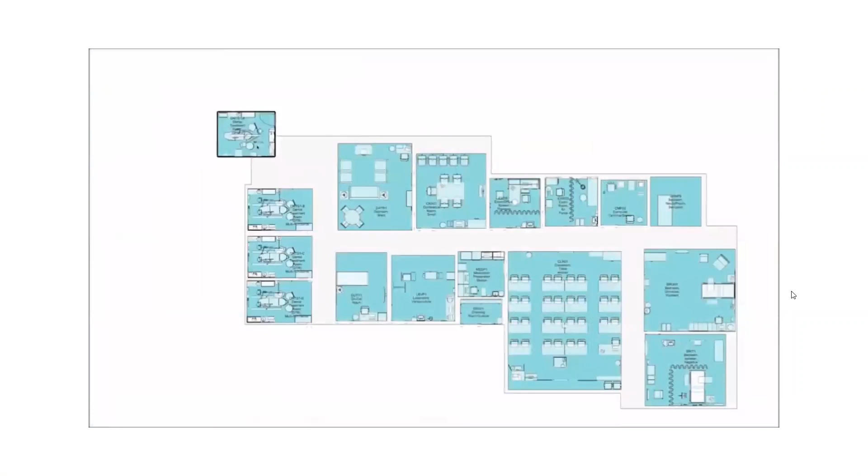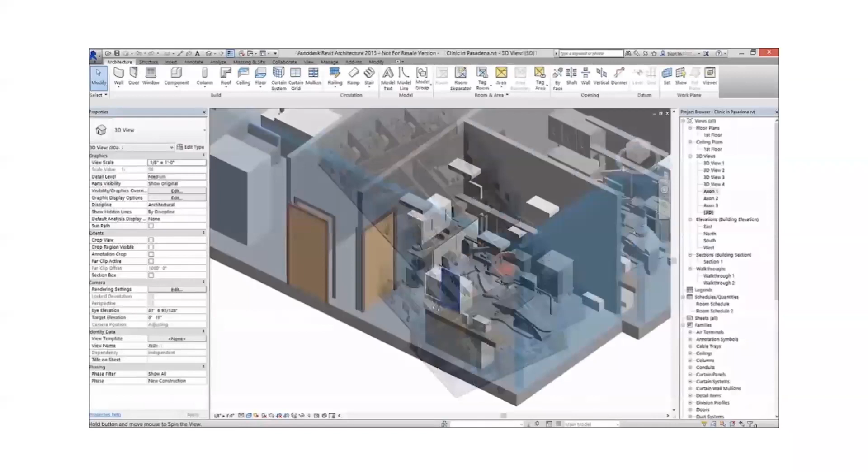So this is an example from different governments. This is the US government, but they're looking at using data from past projects and computer systems to really create designs. So again, I'm going to play that one more time, but if you can program all your information, it can come in and create a floor plan how you feel like you want it, run optimizations, and then it'll auto-populate your Revit model, which will create working drawings and so on and so forth, and all your schedules. Is there a need for architects?

No, again, this isn't going to happen overnight, and this isn't going to happen at a large scale, but what we're trying to prove here is that construction technology, design technology, and technology in general is having an impact, and there's a way to leverage it that really does provide a competitive edge for companies right now. And especially folks becoming architects right now, you have an advantage to embrace this technology, because that is something that's really hard to find. It's folks that are not only well-versed with design and that background, but also are able to push the technology.

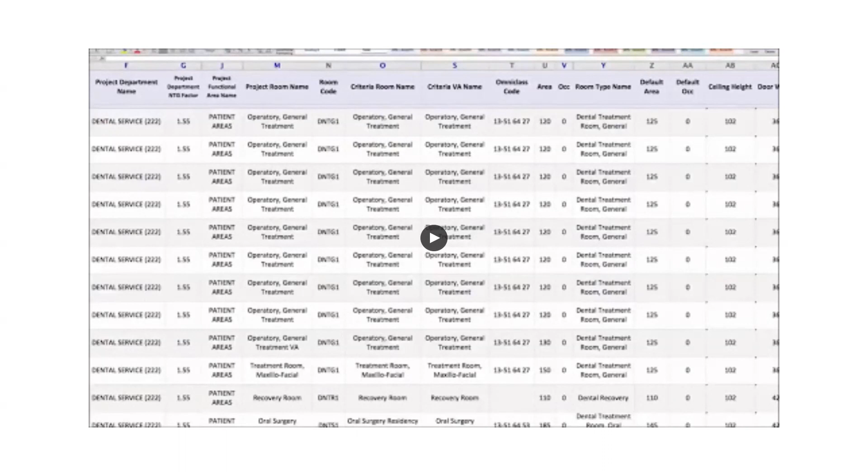So before we wrap up, I want to leave a quote here so you guys can sort of reflect. So this is from Patricia Schuman. She's a librarian, I think back in the 50s. So this is a really old quote, but it's never been more applicable, I feel like, than now. So essentially what she was saying is, we're not experiencing an explosion of information. It's actually data. We're experiencing an explosion of data. And just having data on its own is not going to help you. You need to be able to access that, right? So you need to know how to use that data in a really good way.

And what really sticks with me is we're experiencing access to access, right? So look at the tools that we have available. How can they be used downstream in the full cradle of the project? How can they help you on the design side, but how can they also help overall the entire life cycle of the project, right?

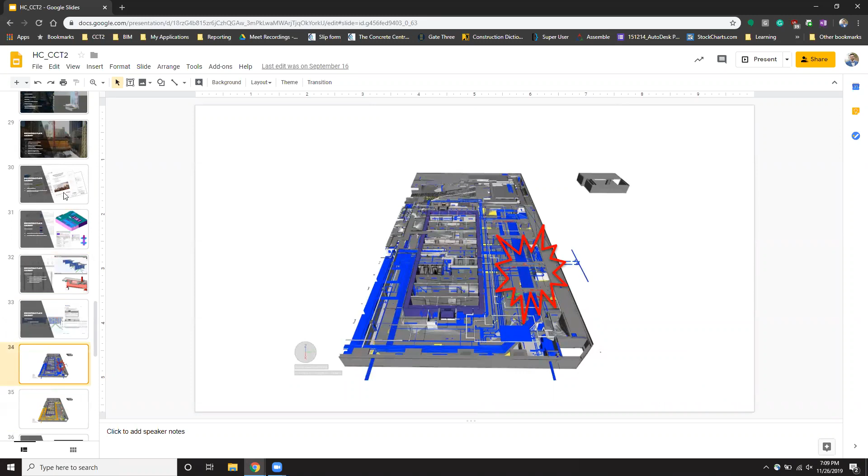There you go. So here's some of the examples, right? So we were able to pull out that level of accuracy from the concrete. We were able to reroute entire systems, mechanical and structural, whereas with the design team, this could have been a very significant rework for them. Because we're using the trades and the fabrication, we know exactly where things need to go and minimize that impact. We're looking at where signage and wayfinding is located, right? So when's the last time anybody's heard of a project where we're using our 3D model to look at where signs are going to be compared to pipes and stuff like that?

And this is one of those areas that I think you were talking about, Douglas, is the pavilion gutter, where it's a really cool butterfly roof. And you can really see the design intent here, and they've shown some of the systems, but when it comes to the actual detail of how do you actually make this happen, that's where 3D modeling, working with our subtrades and contractors, came into use. And the same thing at the crown.

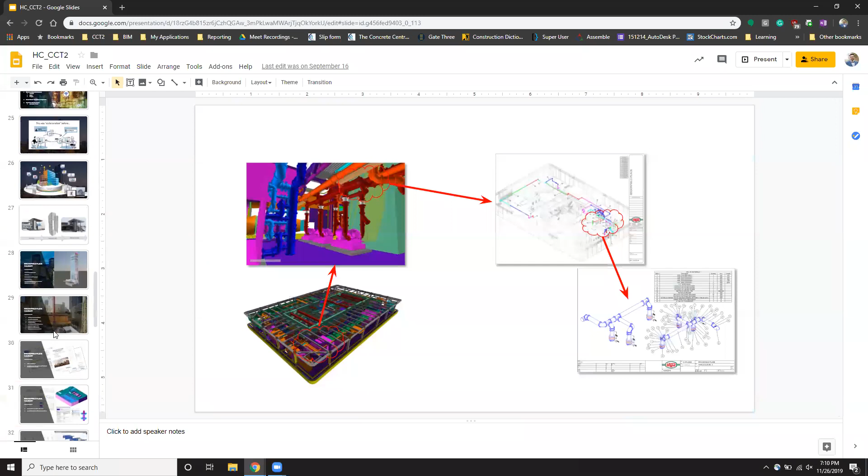So they had their parametric model with some of the engineering requirements, but we got it to a level where we knew every nut and bolt and the different types of forces on each of those, and working with the actual glass that was going to be in there and the different clips, and that sort of granularity, if you will, which led to the prefabrication. So yeah, any other questions about that project?

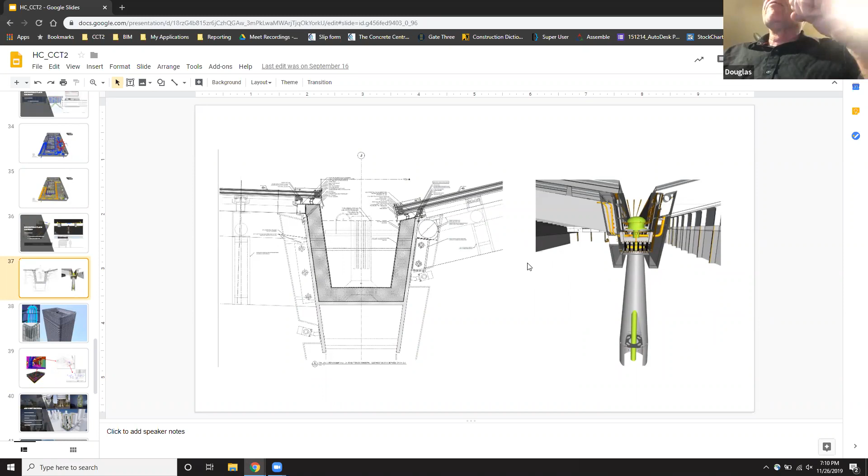If I could just add, just so that for Jess and David, typically how that process would have occurred would be the architect would have produced that drawing in the drawing package, the one on everybody's left, and then it would have gone back and forth with requests for information and shop drawings, and it takes an incredible amount of time as everybody tries to figure out exactly what that drawing really means when it's put into 3 dimensions. It's timely, and it's an expensive process.

If I understand correctly from what Hammad said, they sort of moved beyond, or they almost ignored that process to go directly to start working out the details of it with the subcontractors, and then sharing what was essentially almost like what the as-built would be like. And so almost circumventing the entire requests for information, change orders, and all of that process to save time and money, but it's different, right? It's exactly right. It's a different approach.

Yeah, it's using more of that manufacturing and sort of efficiencies that you would see in airplane manufacturing, or mass production of cars and your cell phones and laptops, in a construction environment for architecture, essentially. So I'm not going to say that we eliminated RFIs and all that kind of stuff, but we definitely were able to pinpoint and work on collaborative sessions where we ironed out a lot of the issues. And any of the documentation we did have to send through was very purposeful and strategic, and it really added to that net benefit.

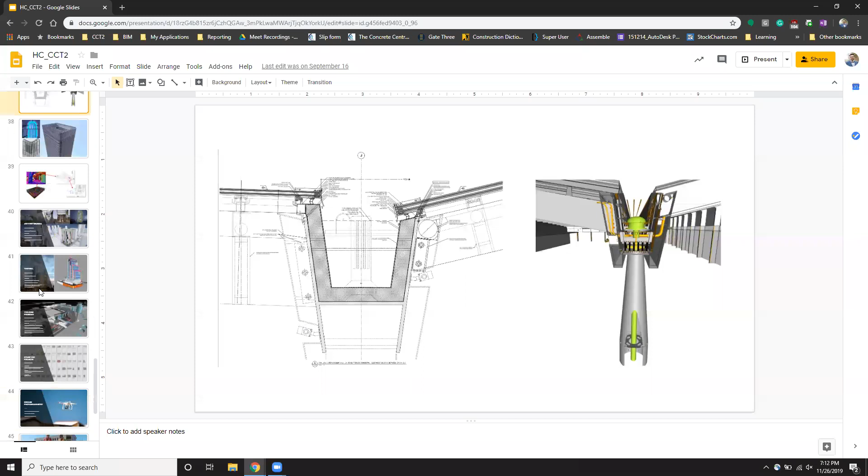And may I just ask, could you share with everybody, clearly you know a lot about this stuff, you were an architectural technologist at SAIT, is that right? Yeah, so I did my AT program at SAIT. And at the University of Calgary, I did urban studies as well. So I worked for a couple of years as an architectural technologist for an architectural practice in Calgary. And then I worked for EllisDon as a project coordinator, as a BIM coordinator, and then worked my way more into the VDC and BIM side of things, and got to where I am today. Well, it's very impressive. Thank you very much.